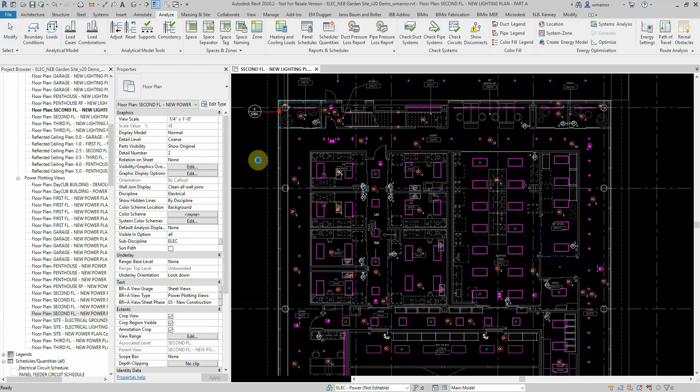I'm going to start off by finding an electrical closet, tiling my windows, and this is going to give me access to a lighting panel, which in turn gives me access to the panel schedule.

If I'm circuiting inside of Revit, it helps to direct Revit to place a circuit by filling in all of the circuits with spaces and then removing the space where I want the circuit to go. So if I was circuiting receptacles on circuits 1, 3, and 5, I can very easily direct them to those circuits in that order.

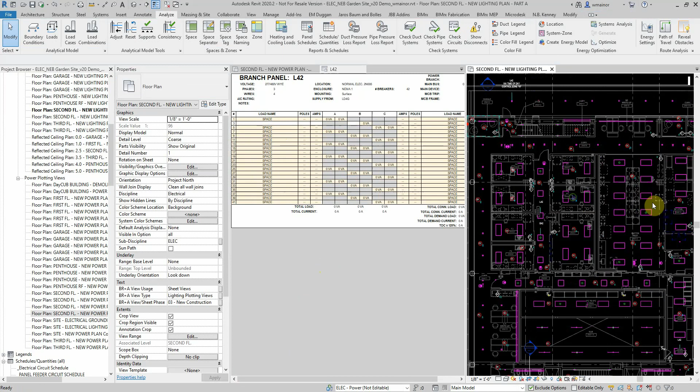On my floor plan, I'd like to isolate my light fixtures to make this easy to look at, and BIMRX has a command called filter select on its core, which gives me access to my company's view filters for selection purposes. For example, I've got a view filter that highlights all of my lights. I can use that to select them, and an out-of-the-box keyboard shortcut HI to isolate.

Then I want to start tagging. BIMRX Core has a command called tag all, which allows me to build out tagging schemas, such as in the case of lighting fixtures where I might want to have a lighting fixture ID tag on the top left, a circuit tag on the top right, and a switch ID on the bottom right.

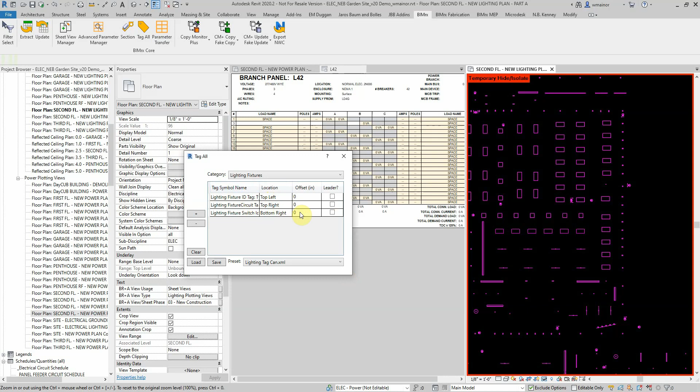We can specify offsets and test out how well they work. I think they look good on our 2x4s. I think it looks good on our cans. And how does it look on our wall washers? I think that looks great.

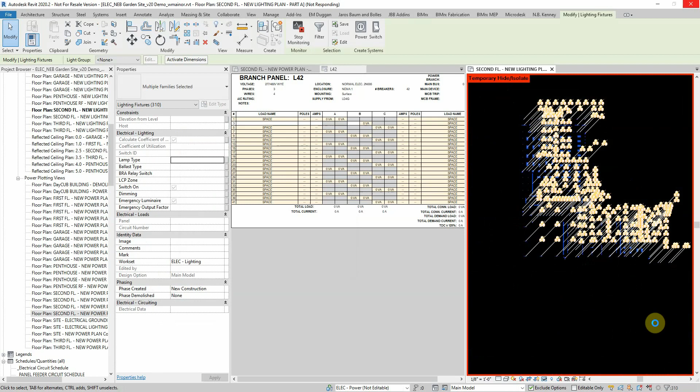Once I'm satisfied with this schema and the offsets, I can draw a large selection window around my entire floor plan. The command is going to think for about 2 or 3 seconds, certainly much faster than it would take to place all of the tags manually. And then it's going to populate my floor plan with all of the lighting fixture tags that I need.

Okay, I'm going to close the dialog box and begin circuiting. Now of course, if I want to circuit and select, the tags are going to get in my way, so I'd like to make it easier to prevent myself from selecting them. We can do that using an SA keyboard shortcut, select all.

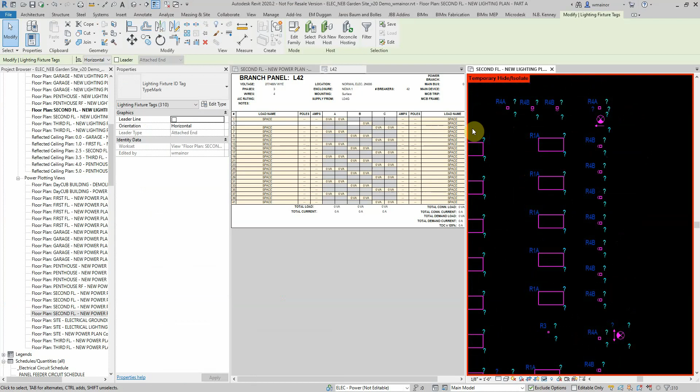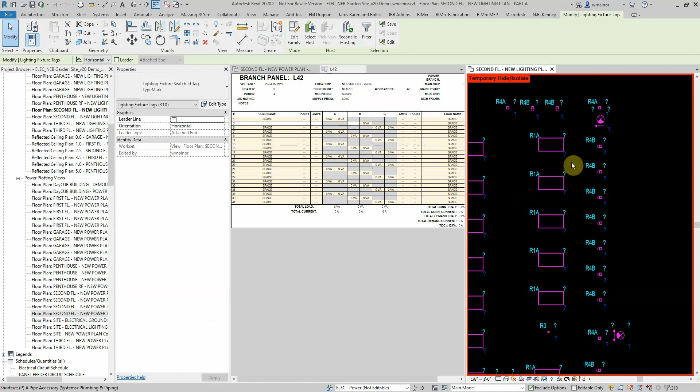PN pins them. With an icon at the bottom of the screen, I can prevent myself from selecting pinned elements. Now, once again, I can do an SA, PN, SA, PN.

Now I'm prevented from selecting those tags, and I can easily select and circuit. I'm drawing selection windows with my control key to highlight lights that I want to add to a circuit. And up on the ribbon bar, I can create a power circuit, and from a drop down I can select the panel that I want to add those to.

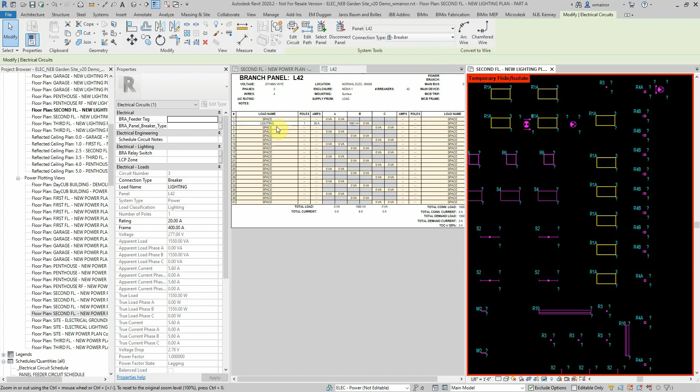In this case, we want to go to E42. I'm sorry, we want to go to L42. Okay, and as I described, that circuit is going to land on the lowest available slot. So now if I want to circuit to circuit number 5, I can remove a space from there.

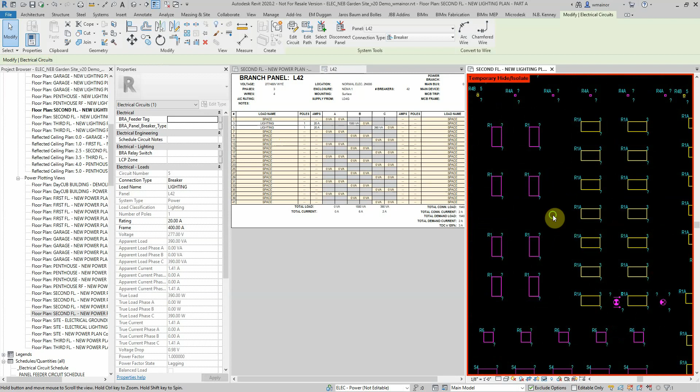I might select all of my wall washers and create a power circuit. In newer versions of Revit, that circuit is going to go to the last available panel that I circuited, whose distribution system jives with the voltage and the number of poles of the elements I selected. I can continue on my way.

Selecting lights if I know what circuit they go on. Of course, I've got to remove a spare. Maybe I'm going to put this on circuit number 2. And add a power circuit.

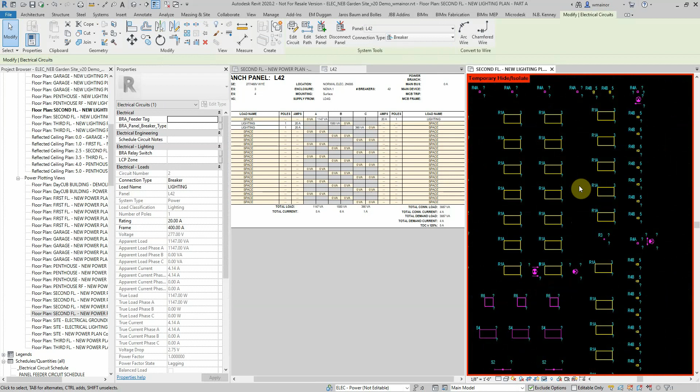So BIMRX has tools that's going to make moving these around a little bit easier. If I knew one of these was an emergency light, I can go to BIMRX MEP, and we've got tools that are easily going to allow me to remove that from the circuit.

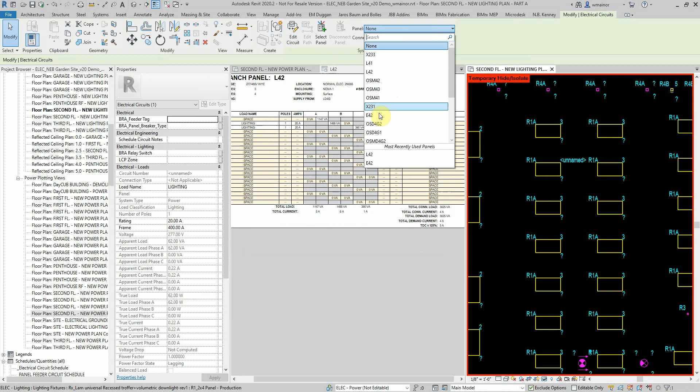Once again, I can create a power circuit, and Revit's going to try to add it to L42, but there's no available slot. So instead, I can come in and add it to E42 now. And now my view filter is going to turn it red, indicating that it's part of an emergency circuit.

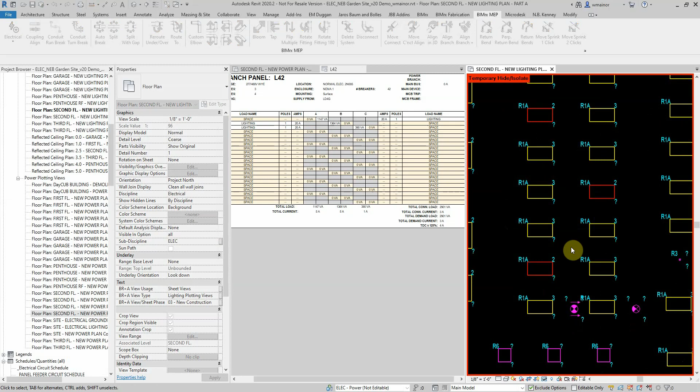Now I can use BIMRX's add to circuit command, which allows me to click on a light fixture on the correct circuit and click on a light fixture that I want to move into that. It repeats the previous command, so I can hit enter in 2 clicks, enter in 2 clicks, enter in 2 clicks, enter in 2 clicks. Very easily I can travel around, and all of those lights are going to be joined on that single circuit.

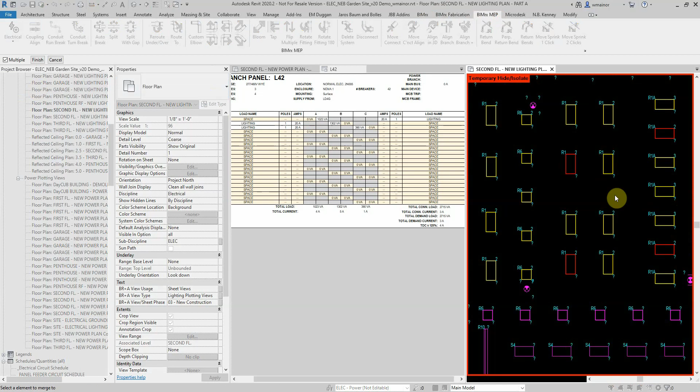Alternately, we can merge circuits. So if I wanted to combine circuit number 2 and circuit number 3, BIMRX has a command called merge, in which I select my correct circuit, then I select something that's on the circuit I want to merge, and everything on circuit 2 now joined circuit number 3.